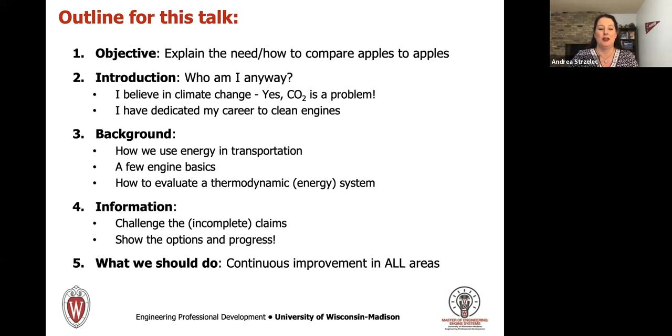So I have to start with some acknowledgements, because I used some material today from some folks who are possibly even on this call. Dr. Kelly Senecal of Convergent Science here in Madison, my inspiration and a Badger, kicked off this defense of the internal combustion engine with a TEDx Madison talk. He's also the creator of Hug Your Engine, the hashtag, and hugyourengine.com. My advisor, Professor David Foster from Wisconsin, also a Badger, Professor Dennis Assanis, who's now president of University of Delaware, Dr. Graham Conway from Southwest Research, and Dr. Todd Fansler, retired from GM, who works with us here at Wisconsin. I'm really honored to have the opportunity to add my voice to theirs and share this information with you. So thank you, Wisconsin Energy Institute Sustainable Energy Seminar, and thank you, Scott.

So what's my objective in being here today to talk to you? In this talk, I want to trash a few false ideas. Number one, electric vehicles are not zero emissions. In fact, there is no such thing. Engine technology has not been stagnant. As I like to say, this is not your daddy's diesel.

A green future does not rely on a single technology. That's where Kelly says the future is eclectic. The future is eclectic—it needs to contain a mix of things.

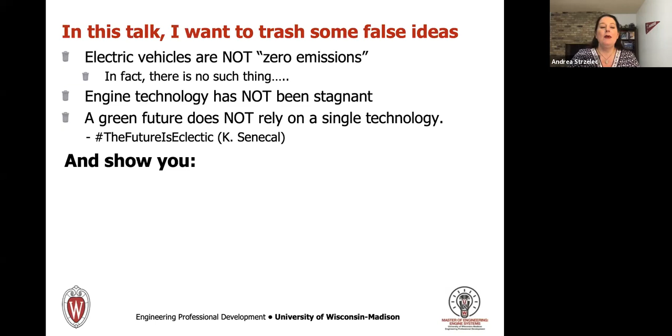I want to show you that dirty is in the details, because it's all in how you draw the boundary of your system. I'll also show you that engines are continuously getting cleaner through novel combustion strategies and catalysts, my personal specialty area. This cartoon encapsulates a lot of what I want to talk about today.

There's the guy on top who's driving the diesel car with tailpipe exhaust, and he feels really dirty because he's driving a diesel. Then the guy on the bottom driving the electric car feels really clean because he has no exhaust coming from the vehicle, but there absolutely is exhaust associated with his motive power—it's just coming from the power plant. So it's separate from the vehicle, but it's still there. This is why there is no such thing as zero. And this is only kind of the tip of the iceberg in that regard.

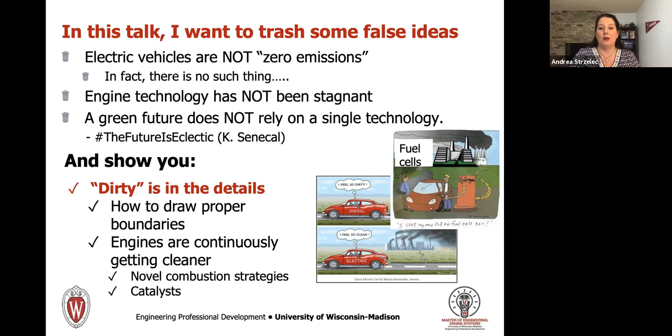By the way, this is also true for fuel cells, which generate electricity by oxidizing hydrogen. Hydrogen combustion only has water as a product, but you had to get the hydrogen somehow, and that comes at the price of a lot of power.

So why am I talking about this? Well, I am a literal engine hugger.

Scott gave you an introduction—I am a triple threat badger. I want to toss out a thank you to USDOE for sponsoring my PhD work, which was done at Oak Ridge National Lab. After I finished, I did postdocs at two USDOE labs. Then, as Scott mentioned, I was a professor until I got the call that was a dream of a lifetime to come back here to the University of Wisconsin and run a program all about engines. Who could pass that up?

I'm also, as students in my classes can tell you, really passionate about thermodynamics. Thermodynamics is the study of energy, its transfers and transformations. But the real key to thermodynamic analysis is you have to properly set the boundary for what you want to study.

I also don't believe in any kind of bans of technology or demonizing technology. Nothing is all good or all bad. There's no silver bullet that's going to immediately work and clean everything up.

I also do believe in engineers—it might be a hazard of being one, but I believe that if you give engineers goals and targets, they will be creative and innovative and get you there. As I said, I believe CO2 emissions are a real problem and they need to be addressed. But I believe that the fastest way to reduce CO2 is by improving all technologies, including the internal combustion engine.

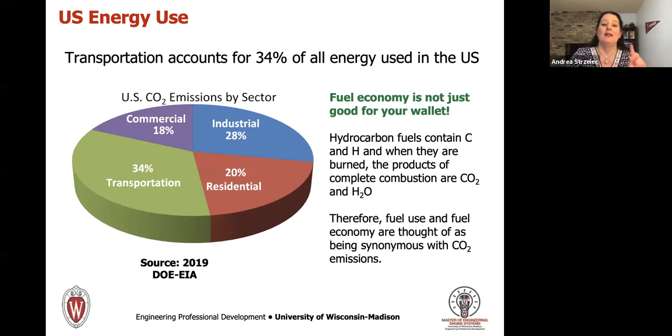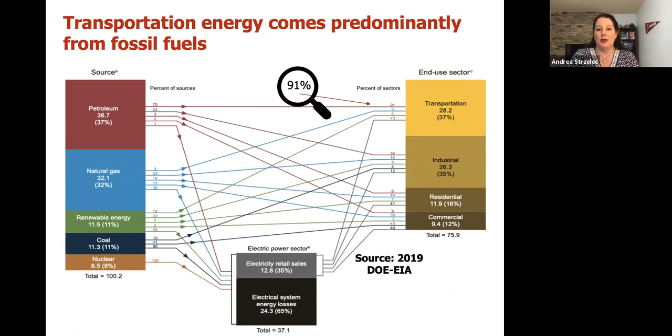Now let's talk a little bit about the history of engines. The first on-vehicle engine was actually not an internal combustion engine at all—it was a steam engine. We didn't see the first internal combustion engine until roughly almost 40 years later, in about 1807. Then the race to engine technology began.

Then we began carbureting, then we had an internal combustion engine vehicle, then the first diesel engine, fuel injection systems, modern fuel injection in the 80s, and modern direct injection recently. Engine technology has never been stagnant—we are not using the same engines that were first designed in the early 1800s, and I think people forget about that.

I think when they talk about technology for transportation, they're talking about how batteries are always getting better, and they act like engines aren't.

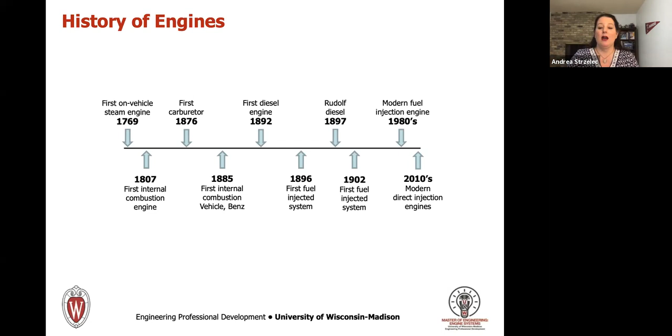That's kind of offensive to someone who spends their career as an engine engineer. They sure are. We've come a long way, baby.

So what's the purpose of an internal combustion engine anyway? You want to produce useful work, which in our case is rotating shaft power, and we do that using readily available, stable combustible fuels. They can be liquid like gasoline or diesel, or gas like natural gas or propane. Engines have a high power density, important for functionality and speed, and they work pretty efficiently at relatively low cost. In some cases, efficiency can be greater than 50%. If you're thinking that's not such a good number, I'll show you later that it actually is, and how that's been steadily improving over the years.

When we talk about engines, there are two types we see a lot: spark ignition engines, which are gasoline engines running on gasoline or alcohols like ethanol, and compression ignition engines, which run off diesel. These can both come in a 2-stroke or 4-stroke variety, and we'll talk about the most common, 4-stroke, in just a minute.

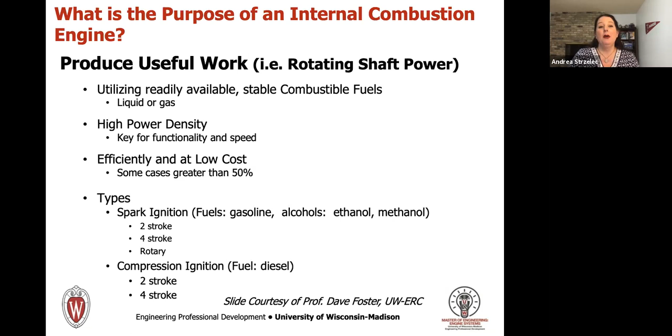So how does a reciprocating engine produce power? Combustion of fuel releases heat in a closed volume. The source of the energy is the chemical bonds in the fuel. The oxygen from air provides the oxidizer, and you have an oxidation of those carbon and hydrogen molecules, which releases a lot of energy. That energy is released in the form of heat, into the closed volume.

In that volume, because the temperature increases by ideal gas law, you see an increase in pressure, and that increase in gas pressure is used to push down on a movable piston. Remember, pressure is a force per unit area, so you have that nice surface area of the piston that the force can push down on.

In order to do this well, you want to coordinate your combustion with the piston movement. How we initiate combustion is different in spark ignited versus compression ignited engines—it's right there in the name. You gotta love engineering nomenclature, we just tell you what it is. We do have to be careful not to exceed the physical limits of the engine, so there are certain temperature or stress limits that we need to keep the combustion event between.

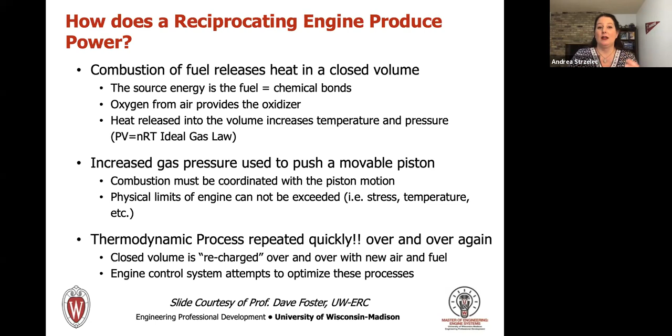This thermodynamic process, combustion, is repeated quickly over and over again, literally in the blink of an eye, during a mechanical cycle. One thing I spend a lot of time arguing with people on the internet about: internal combustion engines do not run on thermodynamic cycles. There is a thermodynamic process that takes place in a mechanical cycle, but that's key for understanding some limitations. It's not a thermodynamic cycle because the closed volume is recharged over and over again with new fuel and air—that does not meet the definition of a cycle. The engine control system, the ECU or the car's computer, attempts to optimize these processes to make it run well.

So here's the 4-stroke cycle, and here's what it looks like. If I tell you that it's suck, squish, bang, blow, you'll probably never forget it. The strokes are: intake, compression, power, and exhaust.

Intake begins when the intake valve is depressed—you can see that on the left. When the intake valve is depressed, the air, or fuel and air in the case of a gasoline engine, can be drawn into the cylinder. The piston moves down and draws in the air. Intake stops when the piston is all the way at the bottom, the intake valve closes, and then we begin the compression stroke.

During compression, both valves are closed, so you have your closed volume. The piston moves up to top dead center, squishing all that air or air and fuel mixture inside.

Then we have the power stroke. This is begun by the spark in a gasoline engine, or by fuel injection in a diesel engine—I'll tell you a little bit about that in a minute—where we begin the process to release energy and therefore push down on the piston and create that rotating shaft work.

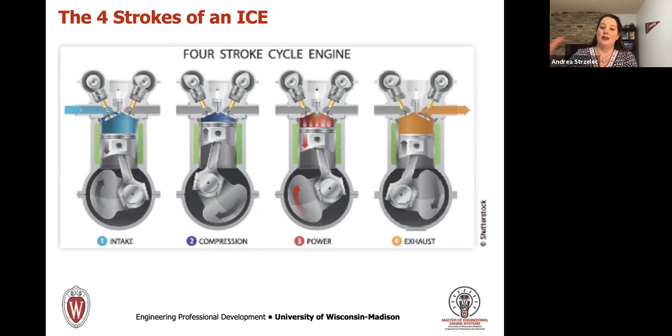Finally, we need to get rid of the spent combustion gases so that we can do the process all again. So we have the exhaust stroke. The exhaust valve on the right opens, the piston sweeps up from bottom dead center to top dead center, pushing out all that old gas. Then the exhaust valve closes and we go back to step one for the intake. So that's the mechanical cycle.

During gasoline spark ignited combustion, we mix the air and the fuel before it goes into the cylinder, so we have hopefully a homogeneous mixture. That's what my golden color of unburned reactants is showing there.

Mixture preparation in old days was done by carburation, and that's what you used to tune. When we talk about taking cars for a tune-up, we meant adjusting your carburetor. Since about the early 90s, most cars have been port fuel injected, meaning the fuel is sprayed into that intake port, mixing with the air as it's being drawn into the cylinder. So you have a nice, hopefully homogeneous mixture of air and fuel that's drawn in and compressed.

The load control of the engine is controlled by throttling the intake. The combustion is then initiated by a high energy electrical discharge across the spark gap. There's the spark, and it sets off a flame. You can see the orange curve of that sunset shape, or sun shape there, is the flame front, and the flame will propagate through the unburnt reactants, leaving burned products in their wake.

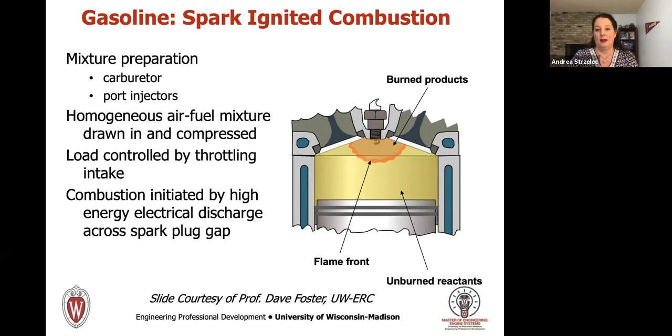In comparison, diesels don't have a spark plug. In diesels, air alone is drawn in and compressed. We control the load of a diesel by how much fuel we inject. So only air is drawn in and compressed, and then the power stroke happens when you begin fuel injection and have combustion ignited by that hot compressed air, in a process called autoignition. So the heterogeneous mixture in the cylinder, because the air and fuel are mixing right there, leads to a wide range of mixture concentrations over which these reactions occur. Therefore, exhaust emissions are a much more significant issue for diesel engines than they are for gasoline.

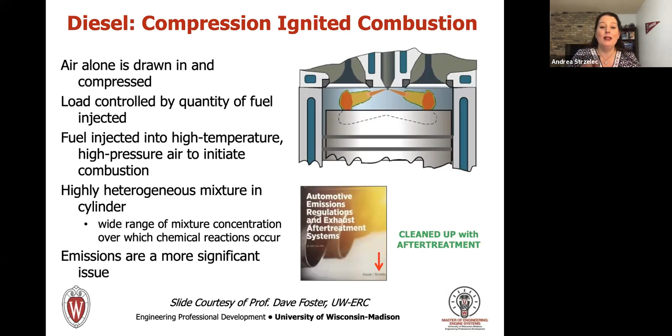However, they can be cleaned up with exhaust aftertreatment catalysts. And I know, I literally wrote the book on it. It's right back there.

When we talk about engines, and especially when we're talking about CO2, CO2 and fuel economy are related. Fuel economy standards are not enough. The targeted fuel economy standards for 2020 were insufficient to level off our CO2 levels because we see an increase in vehicle miles traveled in general. True, the pandemic has slowed that down, but there are also more countries coming online as having vehicles, so our CO2 emissions in developing nations are increasing. And even though you might have cars developed with higher and higher mile per gallon ratings, the issue is people don't buy a new car every year, so it takes a long time to penetrate the vehicle fleet to get that average fuel economy higher.

So CAFE, the corporate average fuel economy standard, is actually why the PT Cruiser is considered to be a light duty truck. That says that for a certain size class of vehicle, the average fuel economy has to be a particular level. So you can take something like the PT Cruiser and make it fit the definition of a light duty truck, averaging its much higher fuel economy numbers in with maybe your light duty pickups, which don't get quite as much fuel economy, keeping those numbers average.

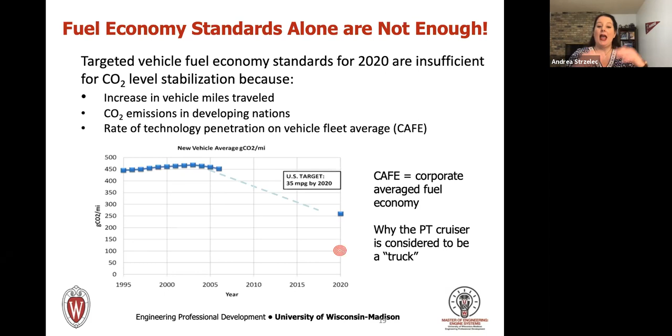Now, here's the question. When did engines become such bad guys anyway? When did they become the villains? Well, unfortunately, I can point to the answer, and that's really the Dieselgate scandal. If you don't know what that is, that's a scandal involving 11 million vehicles between model years 2009 and 2015 that were intentionally programmed not to meet emission standards.

Note, the vehicles absolutely could be clean. They had all the aftertreatment they needed to be clean. But Volkswagen prioritized the fuel economy of the vehicle over meeting emissions, and so unless the vehicle was being tested, they didn't run the aftertreatment. The result of this was a couple things: big fines, I think some of the largest the EPA has ever doled out, and jail time for some of the Volkswagen executives.

It also resulted in lots and lots of claims of the end of internal combustion engines and the beginning of what I'm going to call the EV hype. And by the end of this talk, I hope you understand why I say that.

You can see The Economist there, which shows the engine is roadkill. And then the BMW headquarters, which was very famously built to look like a 4-cylinder engine, turned into batteries with some lights and the saying, "The future is electric," which I'm pretty sure inspired Dr. Senecal to change it to "The future is eclectic."

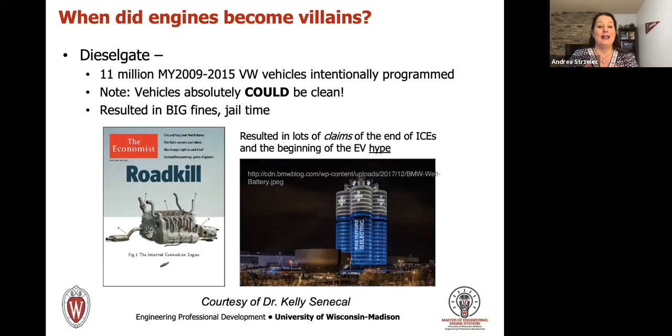Now, let's talk about the science. When we talk about thermodynamics, it's really important to define your system. That's whatever it is you want to study. The first thing you do for energy analysis is pick what that is. This is the most important step in thermodynamic problem solving. You might think that sounds too simple, but it's totally true.

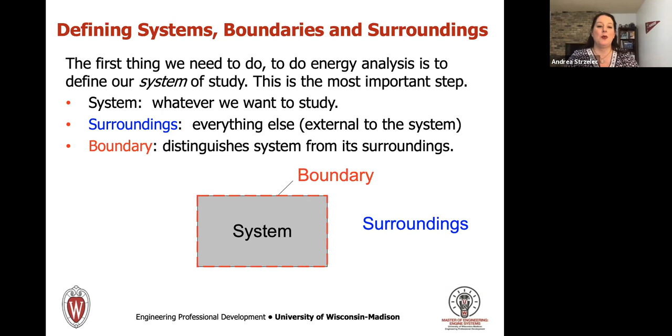Everything that's not in the system is the surroundings. This is going to be important later on. So everything not in the system is the surroundings, and the boundary is what we use to distinguish the system from the surroundings. We have to really consider the system we are considering when we're doing a direct apples to apples comparison. If we're only looking at tailpipe emissions, are we actually comparing the correct systems?

So I'm going to tell you right now, to do a proper comparison of efficiencies and emissions of these vehicles, you can't cherry pick the system. One vehicle is considering the source energy and the other isn't.

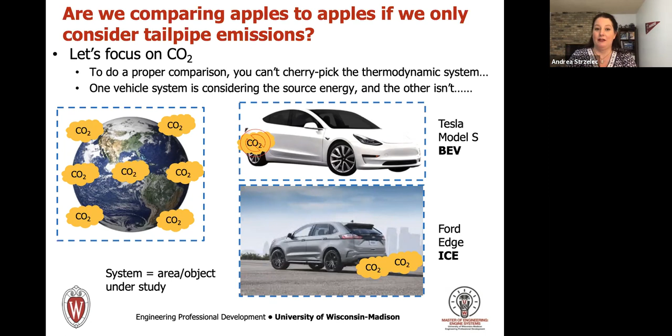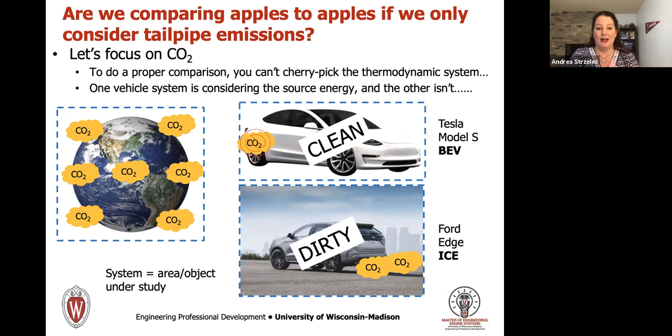So, is it fair to say that the Tesla is clean and the engine is dirty? Not so much. If we make a fair comparison, in the state of Wisconsin, most of our power comes from coal-fired power plants. So there, I fixed it. Look at that nice coal power plant that's in the picture with the Tesla. That's the correct system to compare directly to the Ford Edge, right?

You have to consider the source energy for both cars. Electricity isn't naturally occurring. Making it generates CO2, and you're not making it on board in the vehicle, you're storing that electrical energy on board in the battery and then using it in the electric drive motor. Right now in the United States, 70%, actually quite a bit more like 75%, still comes from fossil fuels.

Now, big exceptions to this. If you're watching us today from Norway or Iceland, congratulations, your electricity is in fact renewable. Norway has nearly 98% renewable energy, and Iceland is 100% renewable on steam. So then in that case, perfectly clean. You can see that Wired magazine shows you the makeup of the kind of power being used to charge these cars in the various markets.

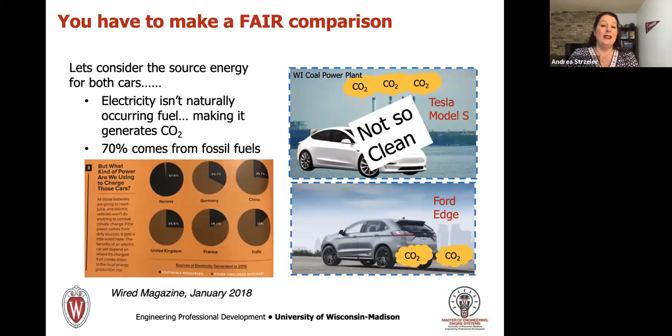In this case, when we consider the power plant, the Tesla is no longer so clean and the Ford is no longer so dirty. So that's just the tip of the iceberg. If you're thinking to yourself already, but wait, engine hugger girl, I am going to use only the most perfectly clean nuclear energy or solar energy or wind energy, that's not the whole story.

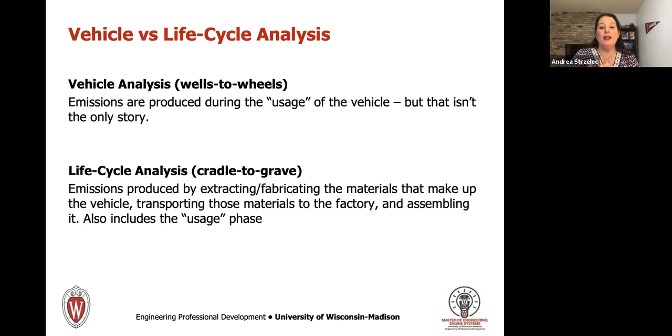It's not only the in-use phase of the vehicle. When we talk about this analysis, it's cheating to just look at the vehicle analysis. Vehicle analysis, also sometimes called wells to wheels analysis, only considers the emissions produced during the usage of the vehicle. But that's not the whole story. Life cycle analysis, sometimes called cradle to grave, considers the emissions produced by extracting and fabricating the materials that make up the vehicle, transporting those materials to the factory, assembling it and all that, as well as that usage phase.

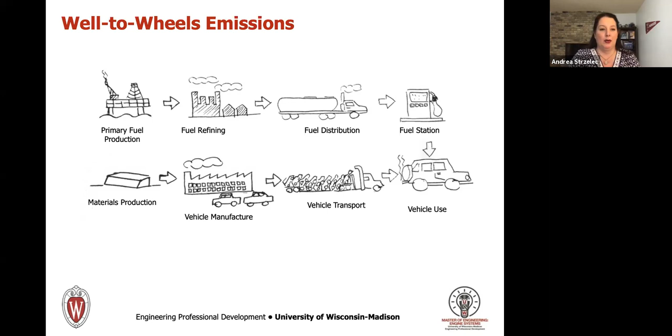So in this case, wells to wheels is looking at that top line where we're just looking at primary fuel production through the refining, to the distribution, to the fuel station, to the vehicle use. But that bottom line there is also important. By the way, each time we transfer energy, we lose some of it. Real processes have losses associated with them. There's things like friction in the engine, or electrical resistance in electrical lines. Every time we handle energy, to make it simpler, we lose some of it.

So for an engine, we put the energy directly into the system in the form of fuel, where it is directly converted via combustion to power. We do lose some of that energy in the combustion process, and you can come take my thermodynamics class and learn all about that if you want.

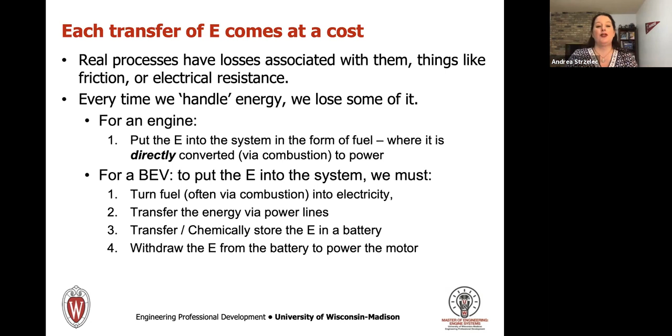For a battery electric vehicle, to put the energy into the system, we first have to turn the fuel, still often done via combustion if we're talking about coal or fossil fuels, into electricity. We need to transfer the energy via power lines. We need to transfer and chemically store the energy in a battery, and then we need to withdraw the energy from the battery to power the electric drive motor.

So that sets up this comparison. If we only consider the tank to wheels on the right in kind of the teal color, you'll see some numbers that are often quoted. Oh, electric vehicles are 80% efficient, and gasoline vehicles are only about 30% efficient. Well, by the way, these numbers are maybe a little bit off. I think gasoline, especially with gasoline direct injection, is up around 32 to 35%. But still, that looks pretty bad, right?

Now, however, if you consider the entire analysis here and get the power or get the energy to the vehicle too, well, now we start adding in the well to tank portion, meaning the power generation, the transmission, the battery charging, or the refinery and transportation on the vehicle side. And you can see now the efficiencies flip. And we're about 83% efficient when you're talking about the conversion of oil into something we can put in the vehicle, and about 30% efficient.

A Rankine cycle power plant's roughly 33 to 35% efficient. And overall, remember, efficiencies are multiplicative. You end up with somewhere around 24% efficient on both.

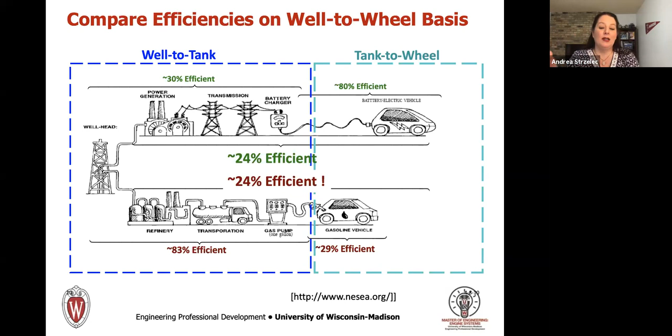So actual fuel economy, of course, will vary by vehicle, driving condition, many other factors. But you can look up the data, this fuel economy in cold weather. I'm sure if you Google DOE Fact of the Week, you can see all the data that goes to support this. So notice that these efficiency numbers are not only impacted, like what we said, but they're also impacted by ambient conditions. And batteries like cold even less than my parents who moved to Florida do.

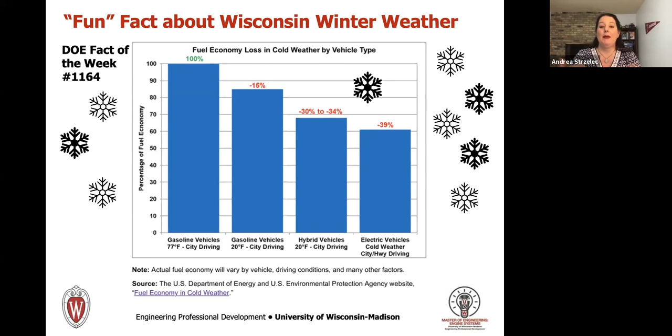However, this is still not the whole picture. What about the manufacturing? And this, my friends who said before, but I'm only going to use green energy sources like nuclear or solar, here's where you need to pay attention, because this is what's saying that's only part of it. So let's talk about the cradle to grave.

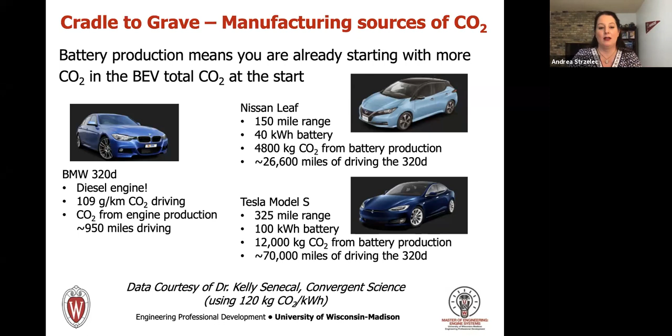So thank you, Kelly, for that data. All of this is using 120 kilograms of CO2 per kilowatt hour. That's about middle of the range. You can see numbers that are bigger or smaller, but that's about the average. So the bigger the battery, the more CO2 you generate in creating it.

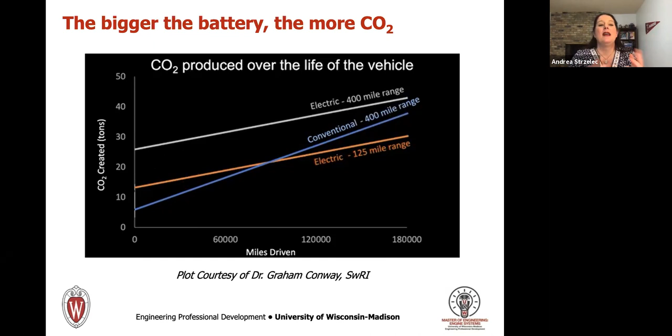So this has the lowest slope, but still has a slope, by the way. If it were truly zero, it'd be a flat line. It's not. The power had to come from somewhere. In the US, it's coming from fossil fuels. Therefore, there's still a slope to that line.

But they were nearly extinct by the 1920s for many of the same reasons we face today: battery energy storage capacity, the so-called range anxiety, limited charging stations, we don't have the infrastructure for charging batteries, and competition with the internal combustion engine.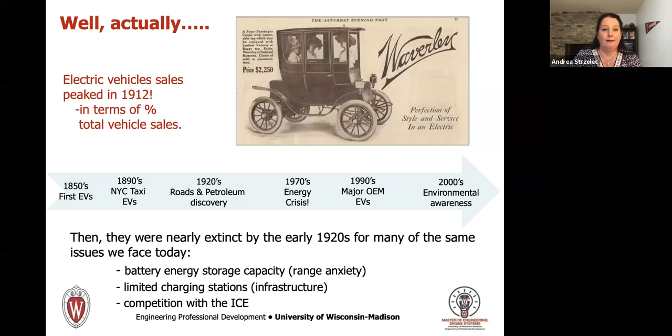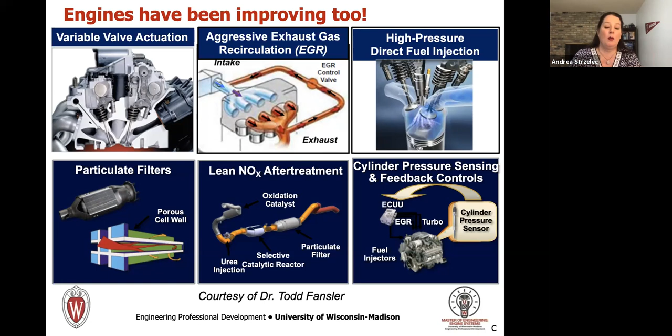And these things are getting results. There's a number of DOE programs out there, like the Super Truck program, which has nearly doubled the fuel economy of semi trucks that are driving all our wonderful Amazon packages around. And the Co-Optima program, which is saying, let's make better fuels and better engines together, and faster.

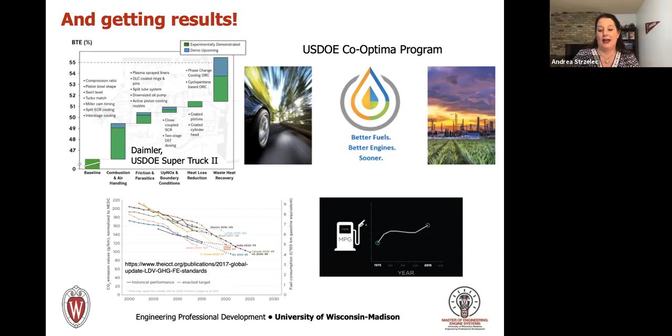The other thing is sustainable fuels exist as well. Biofuels are renewable, derived from biomass like trees, grasses, ag residues, and algae. And there's a huge range of options you can make them into: biodiesel, bioethanol, bioreformates like Virent right here in town, biomethanol, biogas, lots of bio.

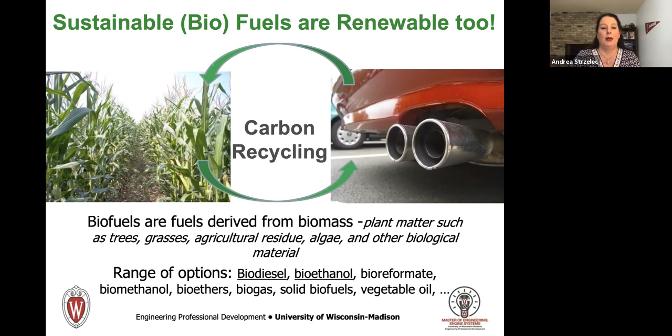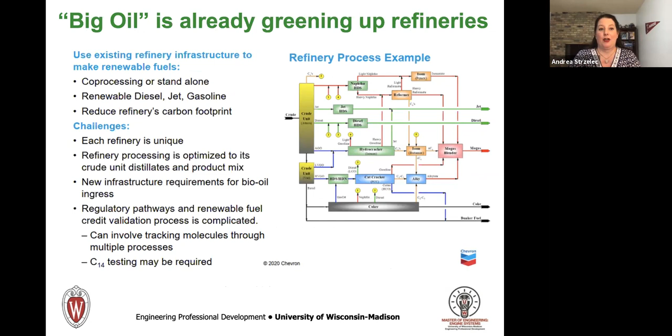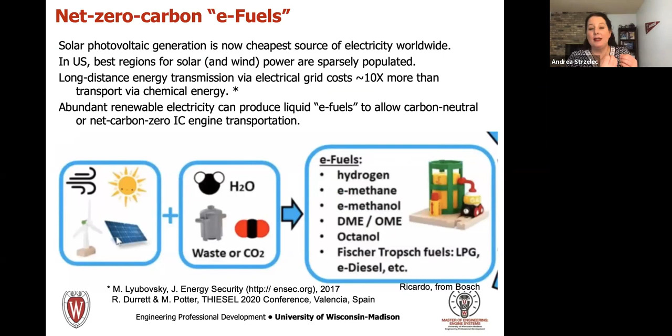And you see, then you're setting up for participating in a carbon recycling loop instead of releasing all that chained carbon that was in the petrochemicals. Big oil is already greening up their refineries, using existing refinery infrastructure to make these renewable fuels. There's also this really cool thing called net zero carbon e-fuels, where we're using electricity to produce liquid fuels from captured CO2. It allows you to be carbon neutral or even net carbon zero because you're capturing CO2 from the air, making it into fuel, and re-releasing it as you use the vehicle.

Okay, so this is all confusing. One's better, one's not better. I'm confused. So what should we do if we really want to go green?

Hybridize. So there's many levels of vehicle electrification. An electrified car isn't necessarily electric, but an electric car is electrified. A battery electric vehicle is 100% electric. If a car has an exhaust at all, it is not electric. Pretty much battery electric vehicles are fully electric, everything else is some level of hybridization.

And we have lots of levels of hybridization. What does it mean to be electrified? It means using electric power beyond just the basic accessories like starter, lights, ignition, which is what your 12-volt battery is in your conventional vehicle. But it's inclusive of vehicles using a wide level of power beyond that.

Micro hybrids, things like start-stop technology - if you have that in your car, you're a hybrid. Regenerative braking is a level of hybridization. Mild hybrids, so maybe getting some of that torque assistance now.

Full hybrids means now you're incorporating in some electric driving as well as battery charging from the internal combustion engine. Then we have plug-in hybrids, where you have both the engine and the electric drive motor, but you charge the battery from the grid power. An extended range electric vehicle means that we have an engine on board, but it's only used to charge the battery or run the electric drive motor. It never powers the powertrain directly.

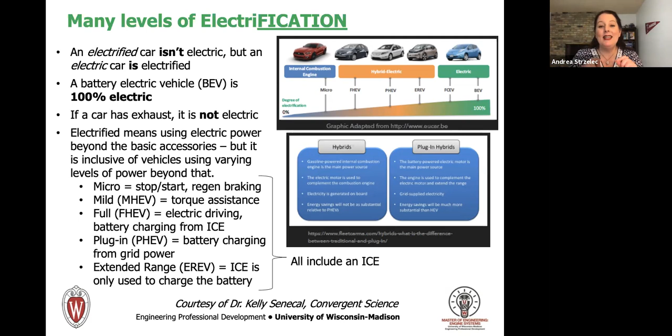But that big list of things that are not battery electric vehicles, that are electrified vehicles, all of them still include an internal combustion engine.

So, brief recap: battery electric vehicles powered by an electric motor. The battery stores electrical energy that powers the motor. The battery is charged by plugging into some outside electric power source, you know, those magical wall outlets, and there is no tailpipe emissions. The driving range can be up to 400 miles per charge. There's a lot of variance due to what model of vehicle, what trip, drive cycle, and environmental conditions.

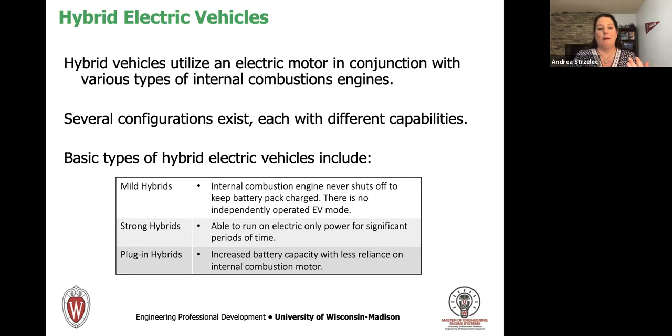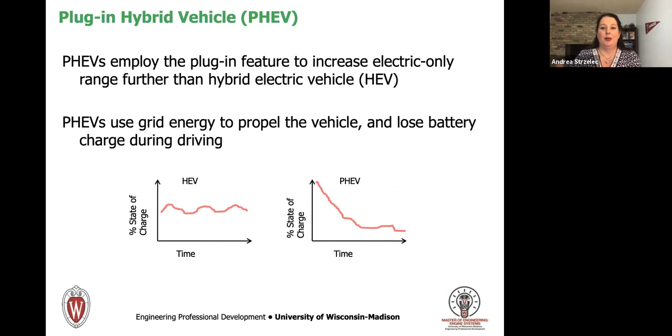Like Wisconsin winter. Hybrid electric vehicles use both an electric motor and an internal combustion engine. Lots of configurations exist, and they all have different capabilities. Some of the types of hybrids we've talked about are mild, strong, and plug-in. Plug-in means that you employ the plug-in feature to get the electricity from the grid. It uses that grid energy to propel the vehicle, and it loses battery charge during driving.

Hybridization increases fuel efficiency. It allows us to downsize the internal combustion engine because the batteries make up for that extra power. It allows us to run that engine at its optimal settings. We can use regenerative braking to reuse the previously lost energy due to friction. We can shut off the engine at idle.

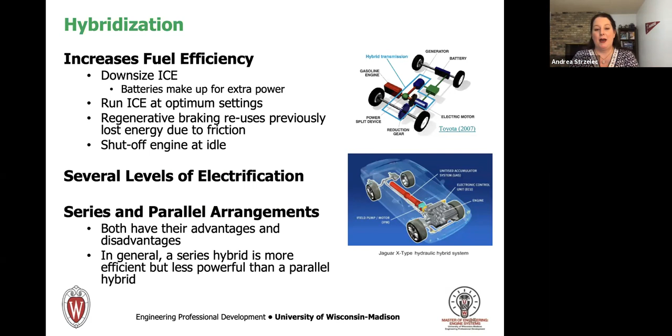Like we said, there are several levels of electrification, and we can have both series and parallel arrangements. Both have their advantages and disadvantages. In general, a series hybrid is more efficient, but less powerful than a parallel hybrid. In the interest of time, I'm going to just go through quickly and show you what these look like. The students in the class can study these slides later.

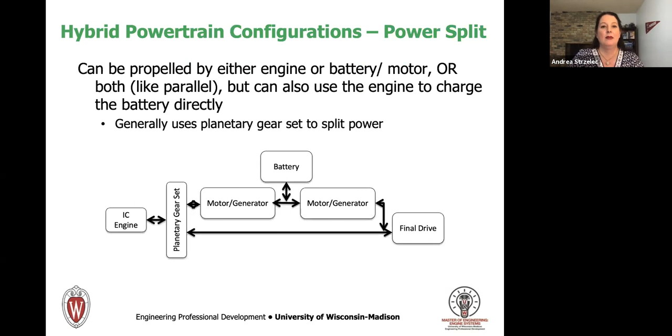Hybrids produce more emissions than the engine in terms of the manufacturing phase, because there is the battery there, but way less than battery electric vehicles because they have a smaller battery. So they start nearly the same. Making and using a hybrid in the US produces less CO2 emissions than a conventional IC engine powered car or a battery electric vehicle. It's just undeniable here. So hybrids, better than either extreme.

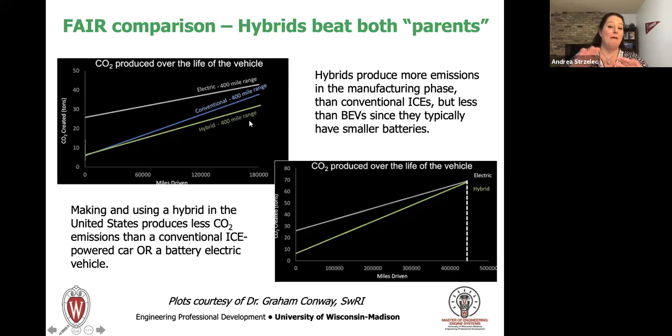Hybrids are electrified, meaning they have both electric and an internal combustion engine. That means traditional internal combustion engines are not going to disappear overnight. They're going to keep continuously improving. There is a future for them. We need them, we need to keep working on them, and that's what the folks at the Engine Research Center work on here.

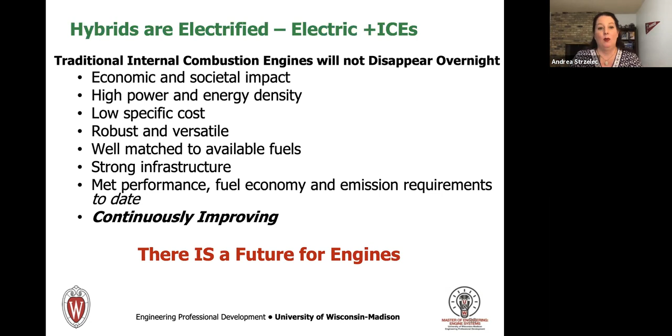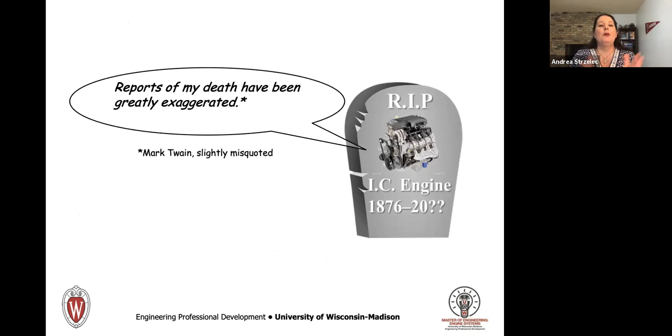So to steal a line, or slightly misquote a line from Mark Twain—thanks Todd for this—reports of the death of the internal combustion engine have been greatly exaggerated. So let's wrap it up now so I can take some of your exciting questions.

The future of transportation needs to be diverse. It needs to include all of these things: spark ignition engines, compression ignition engines, gas and diesel fuel, alternative fuels, advanced engines, hybrid powertrains, fuel cells, hydrogen, electrified powertrains. All of these things are the answer, not just one. There's no silver bullet, no one of these is the right answer. Which one is best for the system depends on a number of things.

I've made a compelling case, I hope you think, for hybrids in the United States. But again, if you're in Norway or in Iceland, then maybe you want to go with just the electric powertrains. The answer depends on a lot of things. And anyone who's been telling you there is this one answer is giving you an incomplete story.

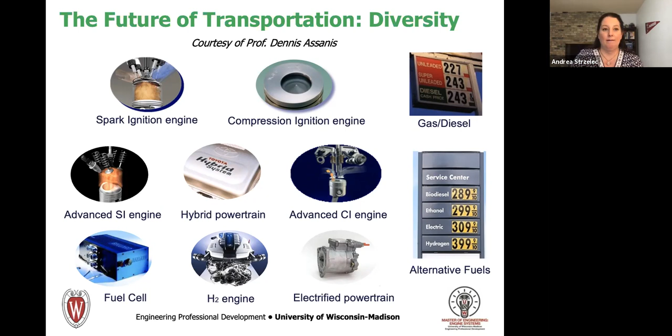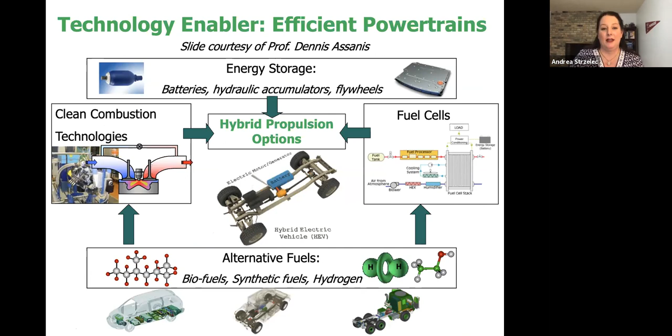There's a lot of technology enablers for efficient powertrains: energy storage like batteries or even hydraulic accumulators, clean combustion strategies, fuel cells, alternative fuels, aftertreatment. All these things lead us to hybrid propulsion options that are cleaner than either of the extremes. There is no silver bullet in this situation. And in fact, if anything, this really shows the power of and.

Dramatic reduction in fuel consumption and vehicle emissions is going to come from efficient energy conversion and next generation biofuels and vehicle electrification and lightweighting of our structures, so that the energy going into the vehicle gets us further. But it has to be guided by a holistic life cycle analysis and an optimized framework. You can't just pick and choose the system you want to look at and not consider what you're including or not including in the comparison.

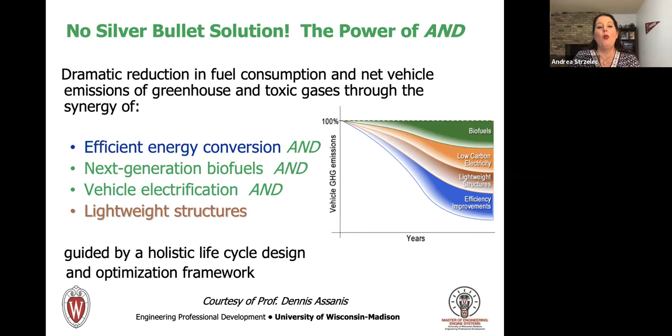So as Kelly says, the future is eclectic. It needs to be eclectic. It needs to be about and.

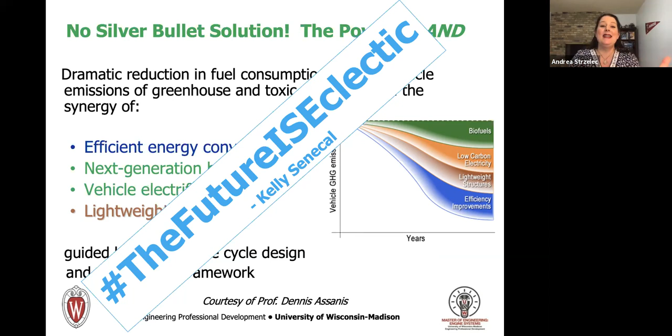So what did we hopefully learn in this talk? Well, number one, there's no such thing as a zero emissions vehicle. You have to draw the system boundary to compare apples to apples, which means including the energy source, because that's where the emissions get generated. So you can have your tailpipe emissions or your distributed emissions, but they're both still there.

Manufacturing also generates emissions, and a lot more for batteries than engines. We can't ignore that, that's a really big deal. And both engines and batteries are old tech, and both of them are continuously improving.

Thank you, engineers. Hopefully you also realize we shouldn't pick winners in advance. We shouldn't use political policy to choose a technology, we should choose the targets. We should use political policy to choose the targets—efficiency, emissions—and let the engineers go to work and make it happen. Policymakers shouldn't try to guess the level of creativity of engineers. Let the engineers get there however it's going to happen.